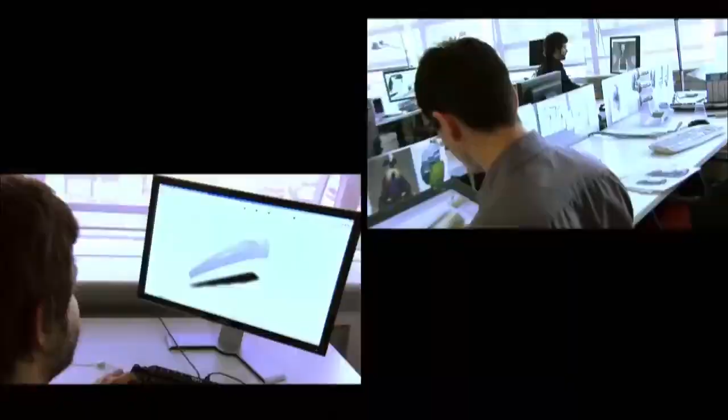Attentively devote to professional research and development. Persist in unique development and creation. Sanyi, a company, develops firmly in its creative way.

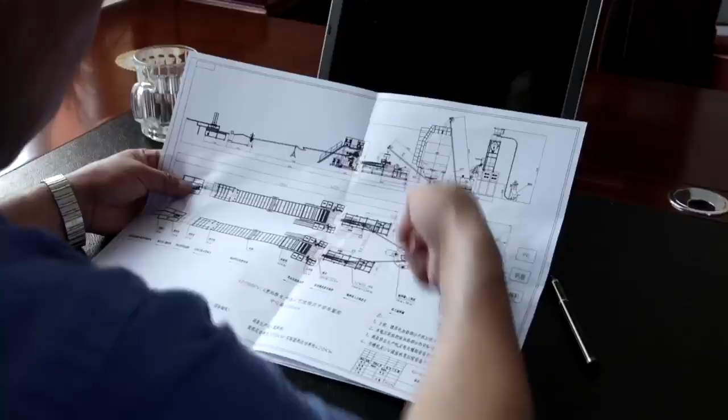Qingdao Sanyi Plastics Machinery Company Ltd, a leading manufacturer in developing and manufacturing PVC machine, was founded in Qingdao in 2006. After 10 years of hard work, our company has developed into a mature supplier for developing, manufacturing, and selling plastics machinery. Continuous wonders: PVC foam board extrusion line.

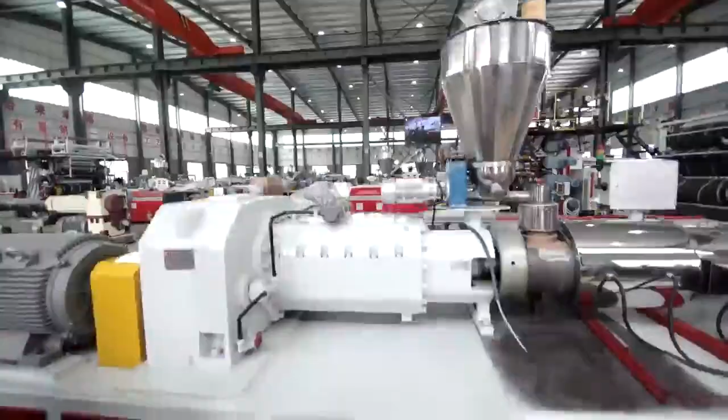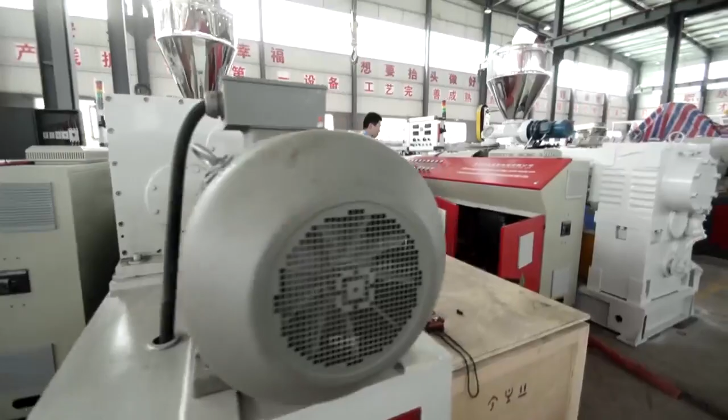Technology brings advantages, and talent promotes the development. In 2007, our company developed the PVC foam board extrusion line, which was the most successful line in China at that time, and it still works smoothly now. Since then, Sanyi Plastic Machinery Company has kept its professional way towards developing PVC foam board extrusion line.

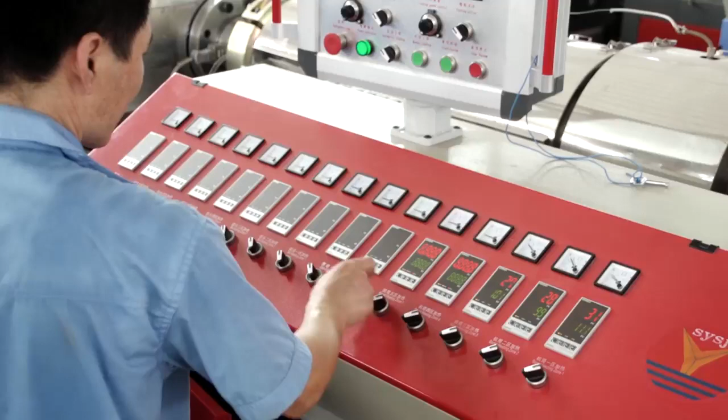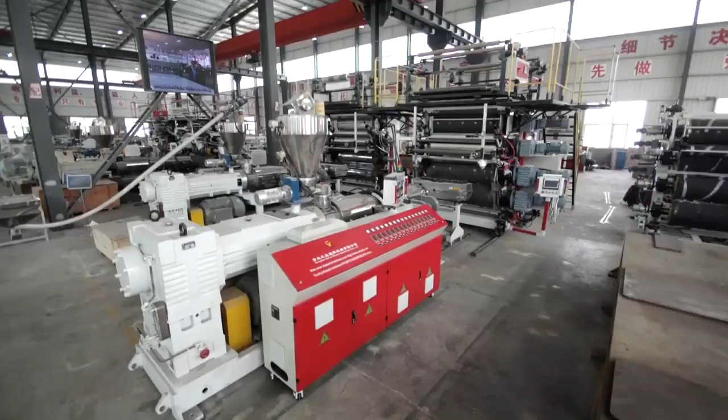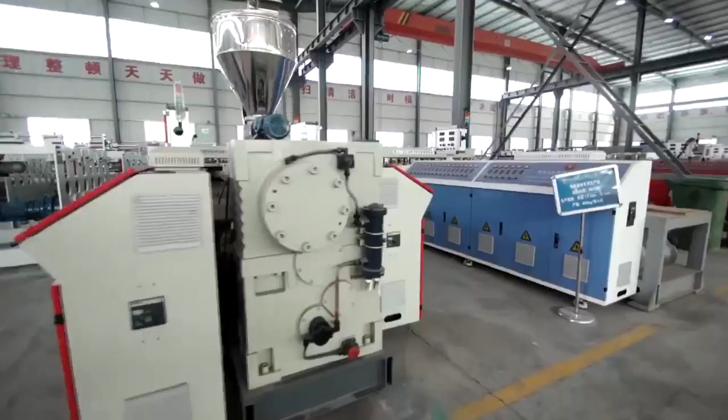In 2016, the SPC floor extrusion line was developed, and the WPC PVC one-step foamed flooring extrusion line and WPC foamed SPC flooring co-extrusion line were developed in March 2017. We've successfully patented several of our lines.

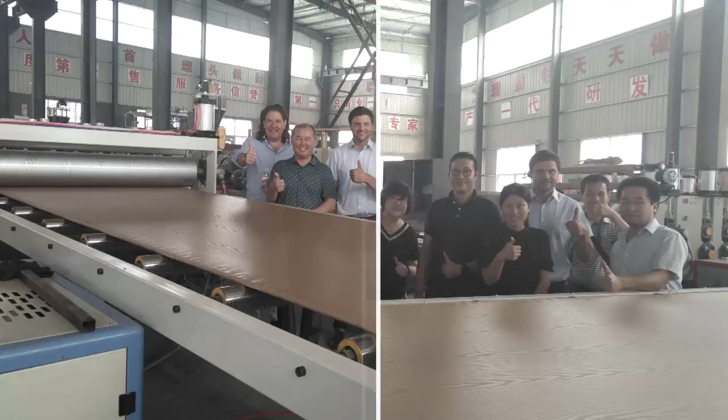In April 2015, Mr. Reber from the leading plastic enterprise Krauss Maffei visited our company to discuss cooperation. Mr. Reber stressed that Sanyi is their only cooperator in China for such a kind of production line. After 2 years of negotiation, we've reached the initial cooperation intention.

Until today, in China, about one third of PVC crusting and foaming producing lines are from Sanyi, and they are even exported to overseas countries: Romania, Germany, Russia, Uganda, Kuwait, Iran, Iraq, Egypt, India, Pakistan, Tajikistan, Thailand, Vietnam, Myanmar, Indonesia, Korea, Malaysia, and other regions. This brings high reputation to Sanyi both at home and abroad.

The chairman, Zhou Yuliang, holds a number of positions in various associations and special committees. Now, he is Managing Director in China Plastics Processing Industry Association, Executive Vice President in PVC Crusting and Foaming Special Committees, Deputy Secretary in China Formwork and Scaffold Association, Vice President in China Plastics Formwork Development Alliance, Social Director in Association of Veteran Scientists and Technicians of Tsinghua University.

Sanyi is picked as the leading company for its industry regulation by State Bureau of Light Industry and the Statistical Data Acquisition Unit for Formwork and Scaffold Industry.

In May 2016, our company was chosen as a research and development base for Qingdao University of Science and Technology, and was awarded the High-Tech Enterprise and Qingdao Famous Trademark. Moreover, we've successfully undertaken and assisted in various forms for several associations.

SPC floor extrusion line, including mixing system, extruder system, calender with online print film and wear layer laminate device, haul-off device, shear cutter, and automatic stacker robot.

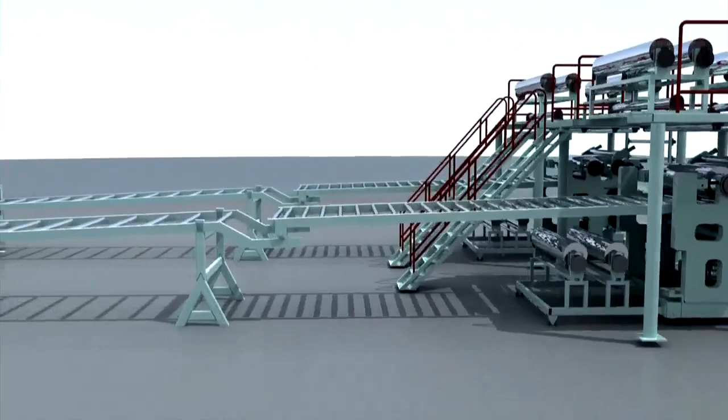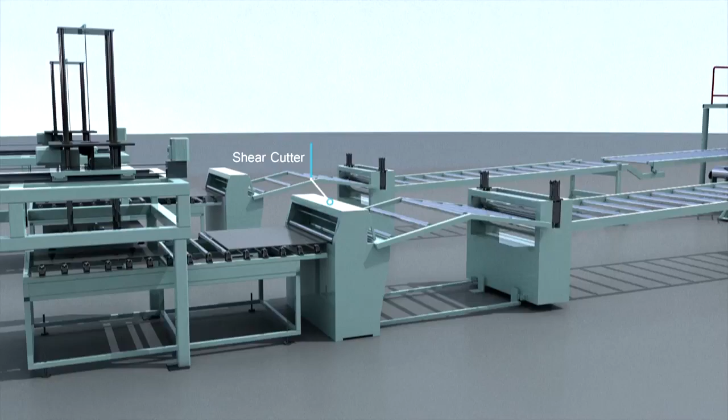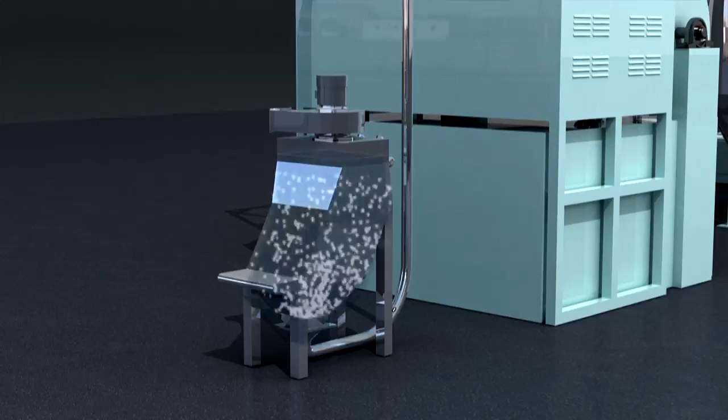Mixing system: firstly, the material needs to be put into the feeding machine according to the formula ratio. The material goes inside the mixer through the material loading machine.

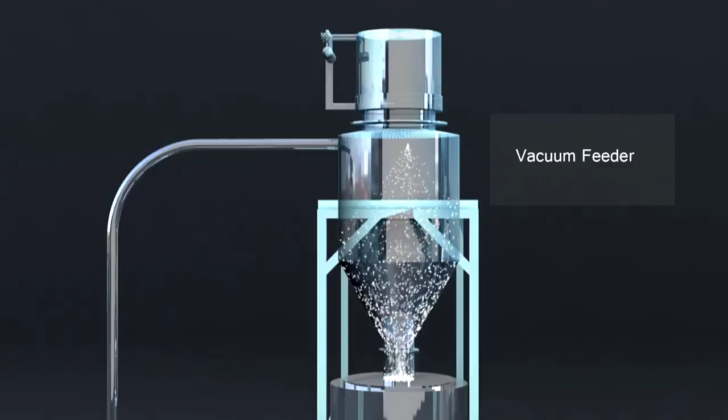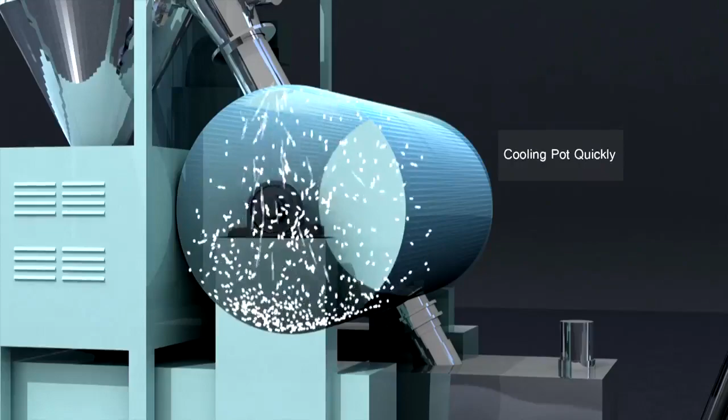The material is mixed at high speed through the friction heating principle, and the temperature is raised to 115 to 120 degrees Celsius. The material is evenly stirred, and the water gas is removed during mixing.

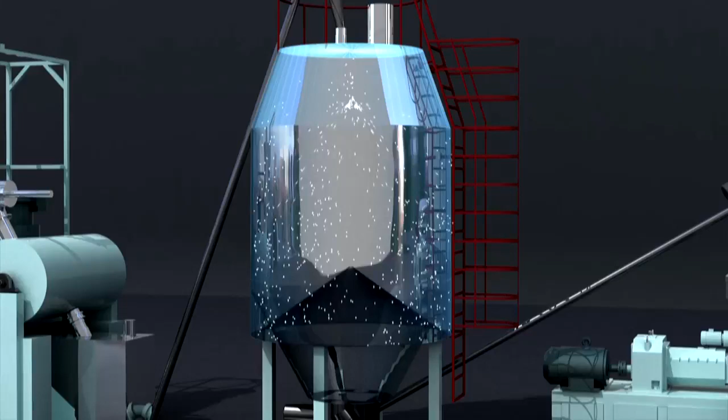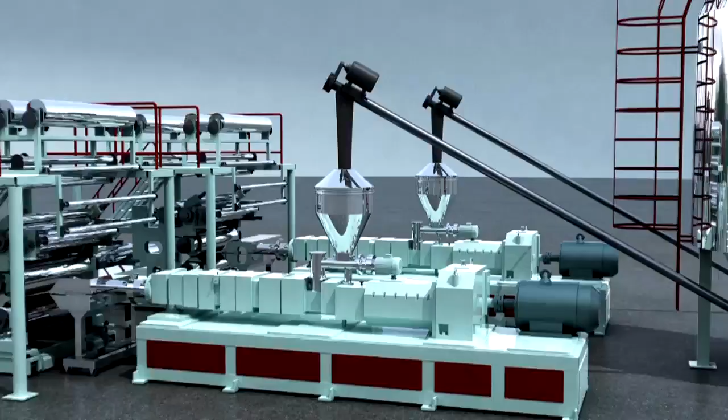After reaching the use requirements, it will be automatically discharged into the cold mixer, preventing plasticization and decomposition in advance, then rapidly cooled to about 45 degrees Celsius, and discharged to the silo. The discharged material will enter the twin-screw feeding system through the screw feeder at a constant speed.

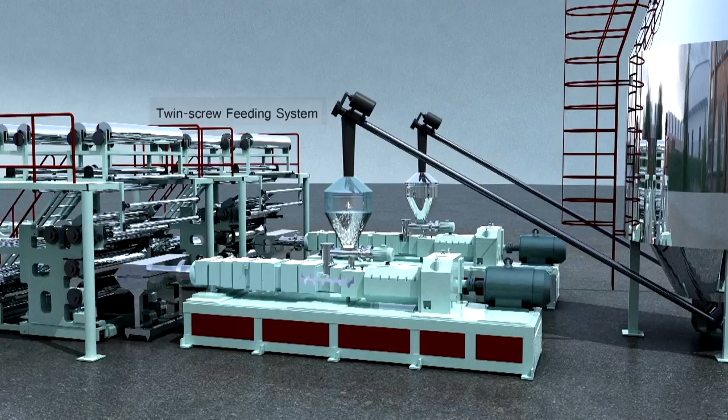Then the twin-screw feeding system evenly transports the material to the extrusion system, and after heating and plasticizing, temperature control is the most critical link in the process.

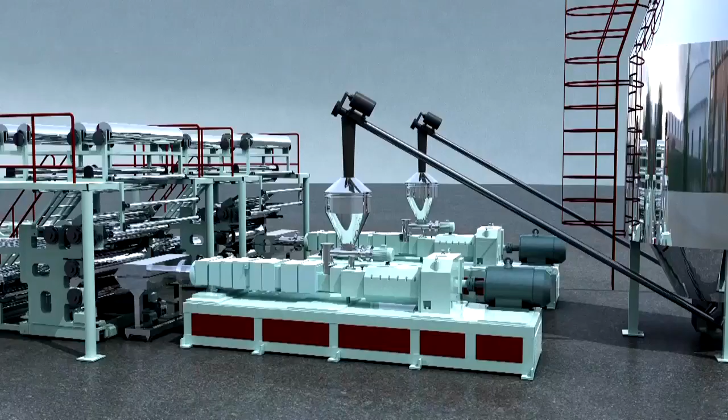The heating and heat-dissipating output is controlled by the temperature control module, and high-precision K-type thermocouple temperature measurement completes the temperature control. After the material is heated to melt, it is rotated by the screw to generate strong pressure and then extruded into the mold. The product specifications are determined by the size of the mold.

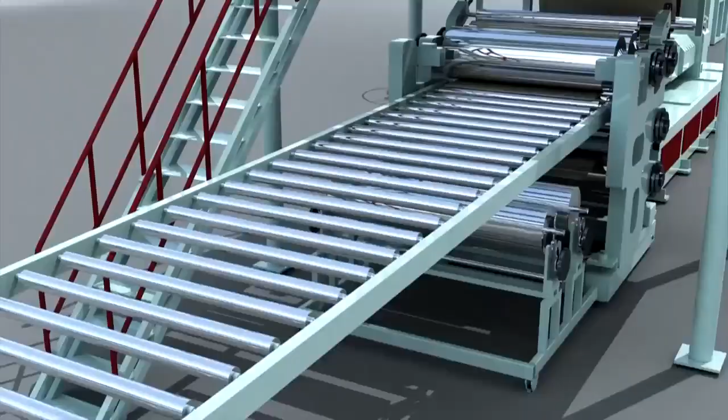Calender with online print film and wear layer laminate device: after the embryo emerges, it enters the calender. Firstly, it is pressed by first and second mirror rollers to ensure uniform thickness.

Then the print film and the wear layer are bonded online by its own temperature and roller heating. Then embossing and an automatic correction system is adopted to ensure that the unwinding line is not offset, thereby greatly improving the quality.

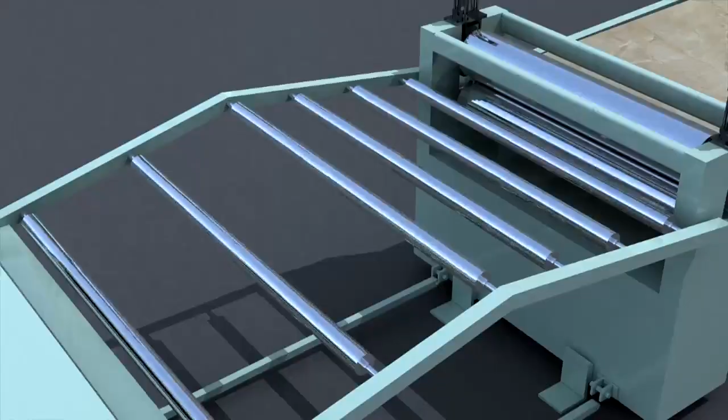Haul-off device: installed with Germany imported Siemens Top Series inverter speed control, it can perfectly match the production line speed.

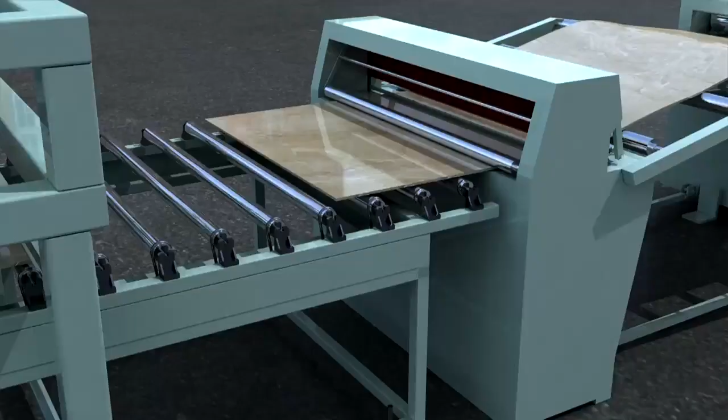The sheet is conveyed by the haul-off to the shearing machine for cutting. The cutting length is set by the sensor switch, which is sensitive and accurate in length control.

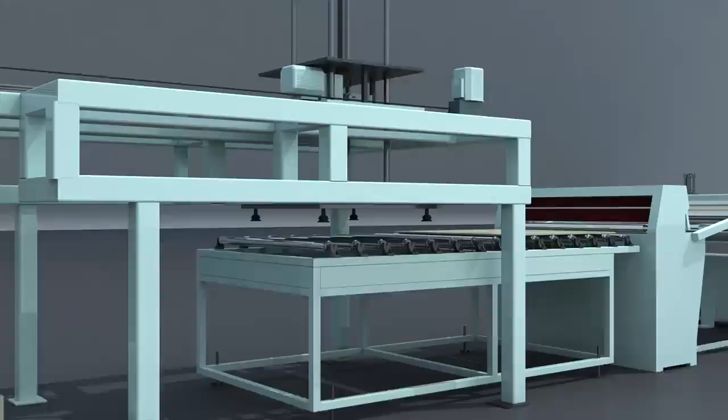Automatic stacker robot: the finished sheet after cutting is completed by the robot.

Electric cabinet system: the main motor and inverter adopt German imported Siemens Top G120 series. AC contactor, breaker, including large breaker, relay and switch, German import, all adopt German authentic Siemens.

If German Siemens can supply, we will import from Germany. If they cannot supply, we will buy from Siemens China. If Siemens China cannot supply, we will use other international famous brands. The temperature meter is from Japan, Omron. The relays, the travel switch, etc. all use France Schneider.